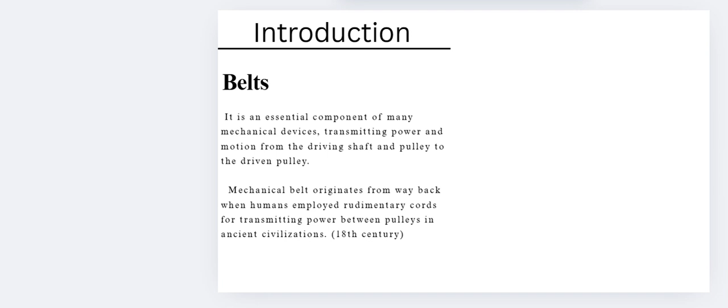Belts are an essential component of many mechanical devices, transmitting power and motion from the driving shaft and pulley to the driven pulley. It is a flexible mechanical element used to transmit power between rotating shafts, typically through pulleys, especially when shafts are relatively far apart or when smooth, quiet operation is desired.

The basic principle is it operates on friction or positive engagement, like in timing belts. The belt wraps around pulleys mounted on the shaft. As one pulley rotates, the driver moves the belt, which in turn rotates the other pulley, the driven.

The common types of belts are flat belt, V belt, and timing belt. Belts are cost effective and easy to maintain, absorb shock and vibration, protecting machinery. It is a quiet operation compared to chains or gears, and it allows for slip, which can be a safety feature in overload conditions.

For design consideration, the belt system must consider power to be transmitted, shaft distance and alignment, tension and speed, and environmental conditions like dust and temperature.

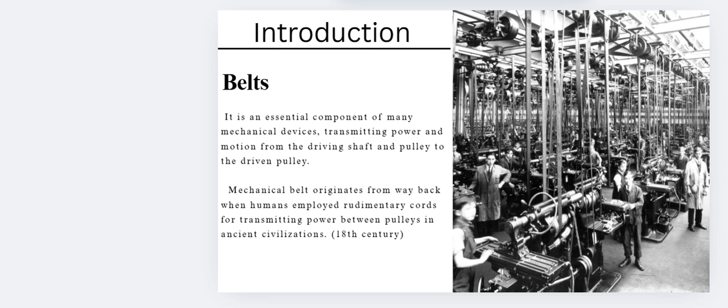Here is the fundamentals of belts. What are the basic parts of belts? The first term is belt. Power transmission occurs through a flexible element. A belt is a flexible loop, typically made of rubber, fabric, or synthetic materials, that transmits mechanical power between shafts.

Pulleys are rotating elements wrapped around fairly tightly by belts. A pulley is a wheel with a groove designed to hold the belt in place. The driving pulley connects to the power source like a motor, while the driven pulley connects to the component receiving power.

Pulleys determine the speed ratio between the input and output shafts. Smaller pulleys spin faster, larger ones spin more slowly.

Here is the shaft, the axle on which pulleys get mounted fairly rigidly underneath machines. It is a rigid, shapely component that rotates and supports pulleys. One shaft is power driving and the other is torque driven. Shafts are typically supported by bearings and elements to minimize energy losses.

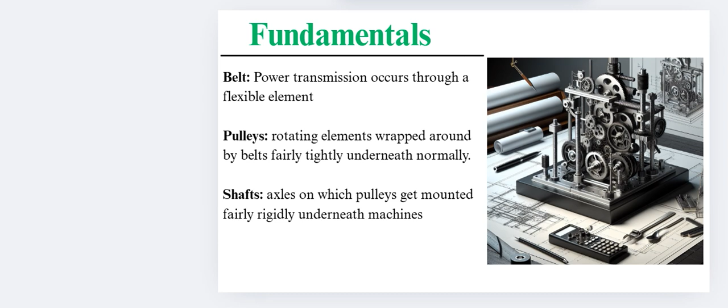Here is the diameter. The pitch circle is essentially the size of the pulley where the belt engages tangentially with considerable frictional force. Diameter refers to the size of the pulleys. The ratio of the diameters affects speed and torque transmission.

Next is the center distance, the distance between the centers of two pulleys, measured quite accurately under normal operating conditions. This affects belt tension and alignment - if the belt is not fit properly, it may sag or slip.

The third element is slip, relative motion between belt and pulley, leading sometimes to considerable power loss under certain operating conditions. Slip occurs when the belt doesn't move in perfect sync with the pulley, causing a difference in relative motion. This reduces efficiency and can affect speed accuracy. Flat belts and V belts experience more slip than timing belts, which are designed for precise synchronization.

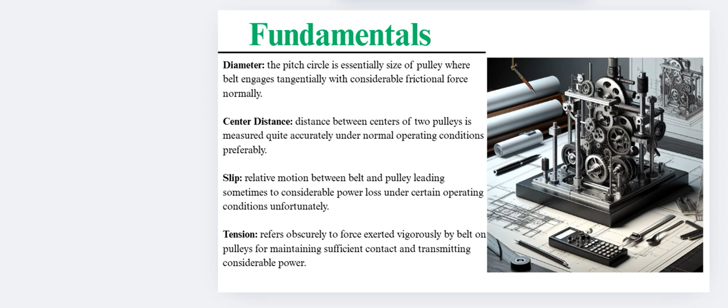Here we have the two types of belt connection: the open belt and the cross belt. The open belt configuration has the belt running in a simple loop with both pulleys turning in the same direction. As we can see, the upper side is the slack side, and the lower is the tight side.

This is the driving pulley, and this is the driven pulley. The purpose is for the driver and driven shaft to rotate the same way. A common use is in fans, pumps, or conveyor systems where synchronized direction is required. The pros of this is that it's simple to install.

Less wear on the belt since there is no twist. So the limitation is it's slightly more prone to slip compared to cross belt.

The right here is the cross belt. The belt is twisted in a figure 8, so you can see the number 8 like this. The figure 8 causes the pulley to rotate in the opposite direction. The purpose is when you need the driven shaft to rotate in the opposite direction of the driver. It is commonly used in textile machines or where reversal is essential without changing the mechanism.

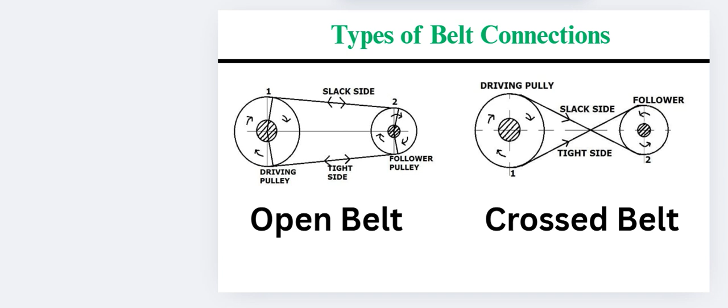So the third slide is the uses of belt. There are three types of uses of belts.

The first one is power transmission. Mechanical systems transfer energy between rotating shafts using belts quite efficiently, with considerable flexibility and relative ease. In power transmission, belts connect one spinning part to another, like a motor to a machine. When the motor turns, the belt carries that motion and makes the other part move too. Think of how a bike chain works, but smoother and quieter.

So conveyor services in the Philippines, R. Dan & Co., Inc.. They provide conveyor machines and processing belts along with consultancy, installation, and maintenance services. In factories or airports, belts move things from one place to another, like boxes, packages, or even your luggage at the airport riding on these belts, like a flat moving road.

The third one is elevator services. In the Philippines, Access Lift and Electronics Corporation specializes in elevator repairs and maintenance, handling even the toughest problems with experienced personnel. So belts help elevators go up and down. They connect the elevator car to a motor system. When the motor turns, the belt lifts or lowers the car safely, in the maintenance problem.

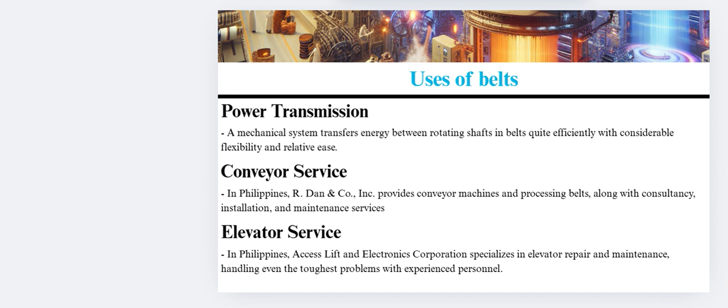Here we have the three types of transmission belts. Flat belt: flat belts are power transmission belts that are flat and made of rubber, synthetic composite, or leather. So a flat belt is like a ribbon, flat and wide. It runs smoothly over flat pulleys and was common in older factories. It is quiet and good for low to moderate power over long distances, but it can slip more easily if it's not tight enough. V belts often drive various engine accessories like air conditioning compressors and alternators rapidly on many automobile engines nowadays with great efficiency.

So the V belt is shaped like a V in cross section. This belt fits into matching V-shaped grooves on pulleys. That shape gives it better grip and makes it great for high power, high speed machines. You'll find V belts in things like car engines, log moving equipment, and lawn mowers.

The toothed belt is known as a timing belt or cogged belt. It is a flexible belt with teeth molded onto its inner surface. This one has tight teeth on the inside which fit perfectly into matching grooves on the pulley. That makes for no slipping at all. It keeps parts turning in sync, super useful for engines where precise timing is critical, like in your car's camshaft system.

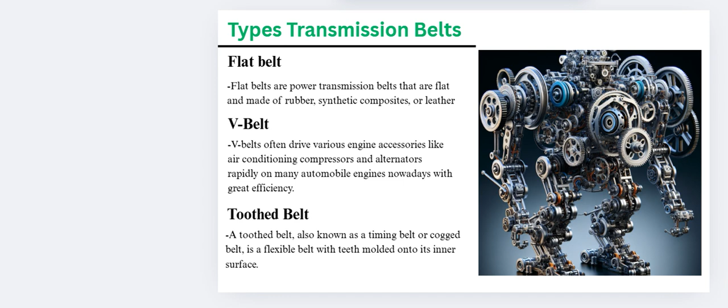Here we have the flat belt. Usual flat belt materials are leather, rubber, stitched canvas, and balata. Leather is one of the oldest materials; it's strong, flexible, and grips well, which helps reduce slipping. Rubber belts are elastic and can absorb shock, which protects machines from sudden jerks.

Stitched canvas is made by layering and stitching fabric, making it both strong and lightweight. Balata, less common, is a natural rubber-like material. It is water resistant and doesn't conduct electricity, so it was ideal in settings where safety was a concern.

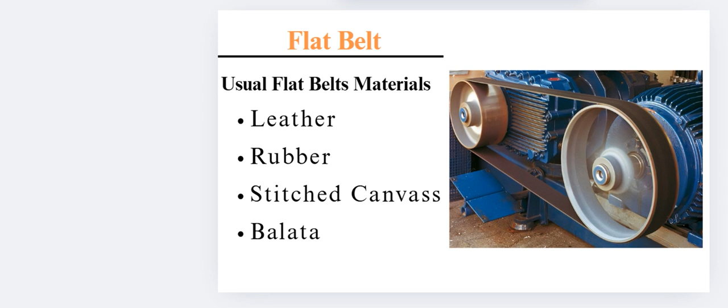Here are the advantages of flat belt: high speed drives, dusty and abrasive environments, long distance between shafts, high efficiency, low cost, and low maintenance.

For high speed drives, flat belts are lightweight and flexible, so they can run very fast without generating much heat or stress. For dusty or abrasive environments, their flat, open design means they don't trap dust or grit easily, and there's no need for close fitting parts like gears or chains. For long distances between shafts, because they are so flexible they can be made very long, flat belts are ideal for connecting machines that are far apart.

High efficiency when properly tensioned and aligned. Flat belts have less bending and friction loss compared to other belts. That means more of the power actually gets transmitted, so efficiency can reach up to 98%.

They're also cost effective, low cost and low maintenance. They're simpler to manufacture and install, and don't need constant lubrication or adjustment. If one wears out, replacement is cheap and quick.

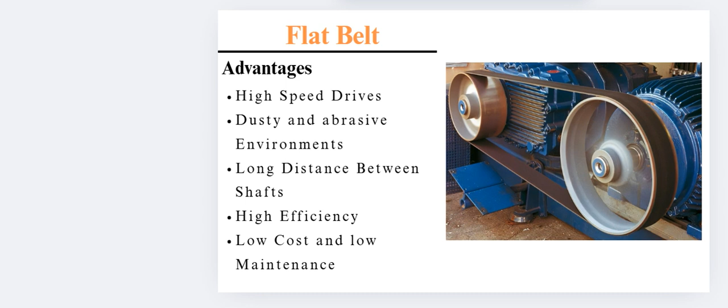Now here are the limitations of flat belts. The disadvantages include noise, slippage, limited speed, quick wear, and alignment issues.

The first one is noise. At higher speeds or under heavy loads, flat belts can slap or flutter, creating noticeable sound, especially if the tension is not perfect.

Next is slippage. Since they rely on friction, any drop in tension, or a wet or oily pulley, can cause the belt to slip, reducing performance.

Limited speed: flat belts are not ideal for carrying heavy loads, so they can stretch too much compared to toothed belts or chains.

Frequent wear: friction-based systems tend to wear out faster, especially if exposed to excessive heat or misalignment over time.

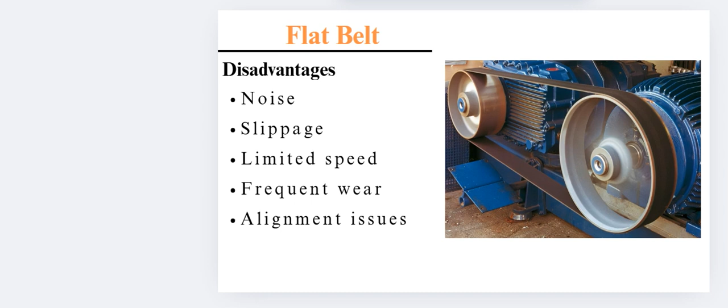Alignment issues: if the pulleys are not perfectly lined up, the belt can wander or come off entirely. Flat belts are more sensitive to this than belts which stay in grooves.

So here are the flat belt design formulas. The belt tension ratio is the ratio of tension on the tight side to the slack side of the belt.

F sub 1 minus F sub 2, all over F sub 2 minus F sub C, equals E raised to F times theta.

F sub 1 is the force on the tight side, the unit will be Newton or pound. F sub 2 is the force on the slack side, the unit will also be Newton or pound.

F sub C is the centrifugal force, the unit must be Newton or pound. E is Euler's number, with a value of 2.71.

F is the coefficient of friction. Theta is the angle of contact, and the unit must be radians.

So here we have E, the irrational number, raised to F times theta minus 1, all over E raised to F times theta.

F sub 1 is the force on the tight side, the unit is Newton or pound. Theta here is the angle of contact, the unit is radians. F sub 2 is the force on the slack side.

So remember everyone, F sub 1 is the force on the tight side, and F sub 2 is the force on the slack side.

F sub C is the centrifugal force, the unit must be Newton or pound. F is the coefficient of friction, meaning it has no unit because it is a coefficient.

The angle of contact, theta, equals 180 degrees plus or minus 2 sine raised to negative 1.

Times d sub 2 minus d sub 1, all over 2C, as an open belt connection.

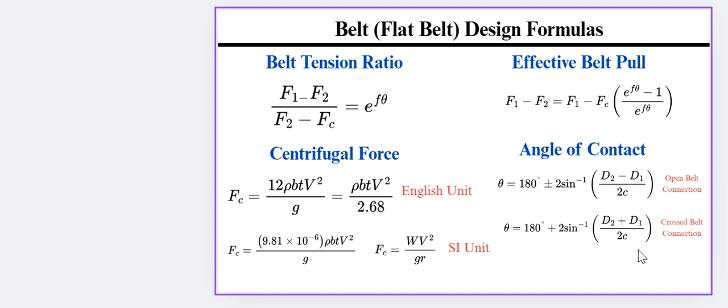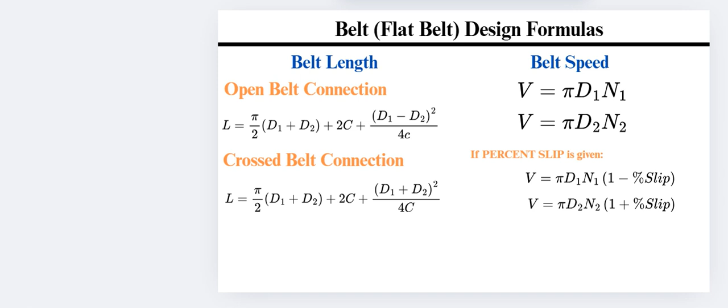Here we have the V belt. Usual V belt materials are rubber, polyurethane (PU), neoprene, Kevlar or aramid fibers. Using rubber is a classic choice; rubber is flexible, affordable, and bends well. Polyurethane, as PU, is tough and resistant to chemical, oil, and wear. It's great for precision equipment in places where the environment is harsh.

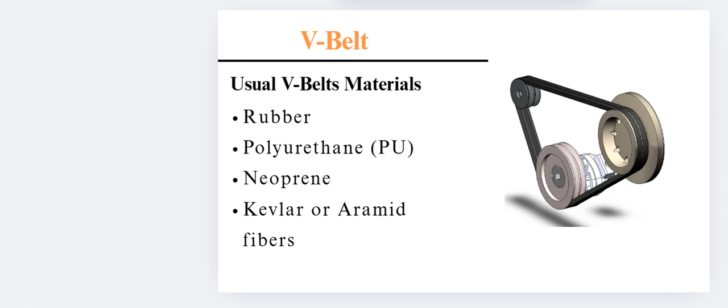Neoprene is resistant to heat, oil, ozone, and aging, which is why it's used in vehicles and industrial machines that run hot. Kevlar or aramid fibers are incredibly strong and don't stretch easily. They keep the belt tight and prevent it from slipping or snapping under high loads.

The V-belt advantages are high grip, efficient power transmission, low maintenance, noise reduction, and space efficiency. High grip means the belt wedges firmly into the pulley grooves, increasing friction, which means less slipping and better traction. Efficient power transmission means V-belts can transfer more torque with less slippage than flat belts, so the power from the motor gets used more effectively.

Low maintenance means once properly installed, this V-belt needs no frequent tightening or lubricating like a chain or gears. For noise reduction, V-belts run smoother and quieter at moderate speeds. Space efficiency allows them to fit in tight spaces while still transmitting significant power.

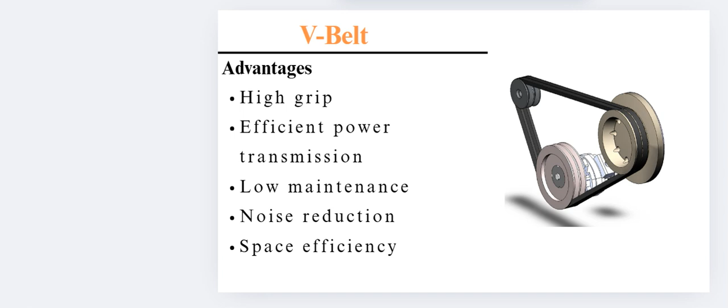Now the disadvantages of V-belts: wear and tear. Friction is great for grip, but it also leads to material fatigue over time. Heat, dust, or oil can make them crack, fray, or lose shape. There are also efficiency losses, some power is lost through slight slippage or flexing under load.

Replacement can be challenging. In some machines, replacing a worn belt is not easy; it requires removing guards or nearby parts, since the belts are buried deep inside.

The last disadvantage is limited speed range. At very high speeds, belts can flutter or heat up, especially if the tension is not right, which can shorten their lifespan or cause unexpected slippage.

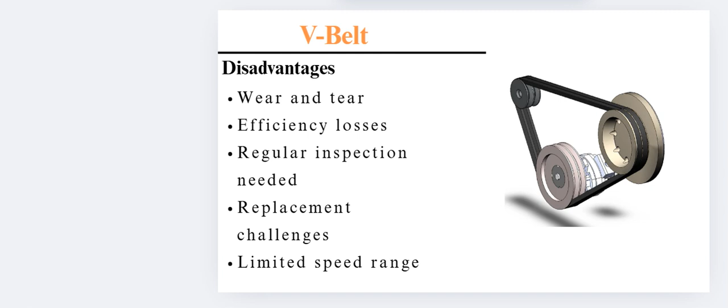Here's the formula for the V-belt and its ingredients. The belt tension ratio: F sub 1 is the force on the tight side, minus F sub 2, the force on the slack side, minus the force F sub C, the centrifugal force. This force F has units of Newton or pound. The theta here is the angle of contact, with units of radians. The f is the coefficient of friction, with no unit. This is the sheave angle, one half of the sheave angle, with units of degrees. The E here is the constant number 2.71.

Effective belt pull: F sub 1 minus F sub 2 equals F sub 1 minus F sub C, times the ratio, E raised to f times theta over sine of half the sheave angle, minus 1, all over E raised to f times theta over sine of half the sheave angle.

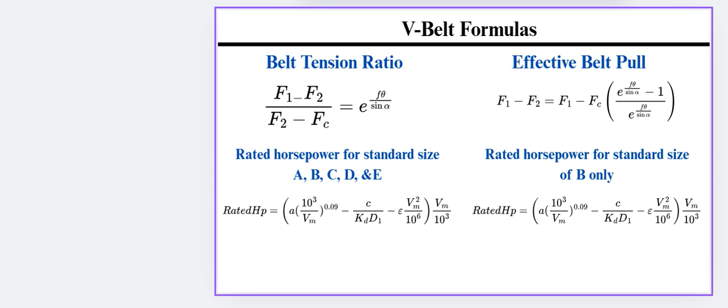Adjusted rated horsepower equals K sub theta times K sub L times rated HP. K sub theta is the arc of contact factor, and K sub L is the length correction factor. This next part is the design horsepower.

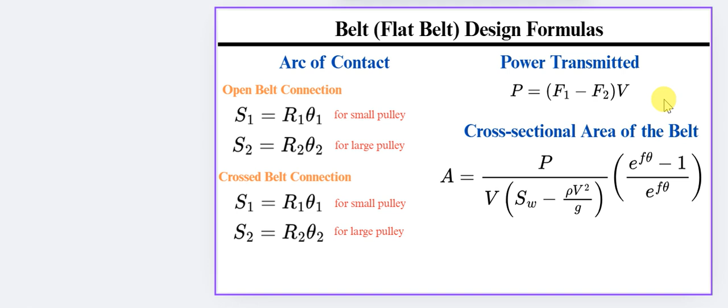Design horsepower equals power transmitted times N sub SF. The power transmitted is shown right here: P equals F sub 1 minus F sub 2, times the belt speed.

So N sub SF is the service factor. The number of belts, N sub B, equals design horsepower all over adjusted rated HP.

So the belt length, for the open belt: L equals pi over 2 times d sub 1 plus d sub 2, plus 2 times C, plus the square of d sub 2 minus d sub 1 all over 4C. For the cross belt: L equals pi over 2 times d sub 1 plus d sub 2, plus 2 times C, plus d sub 2 plus d sub 1 raised to 2 over 4C.

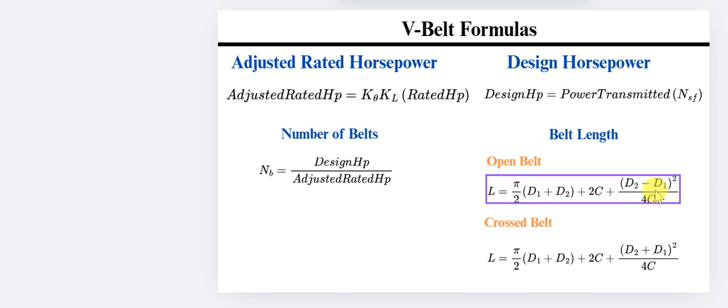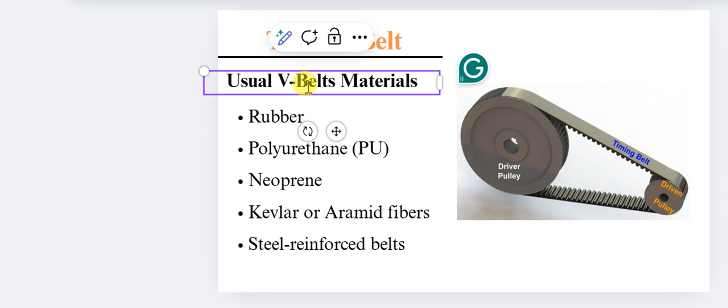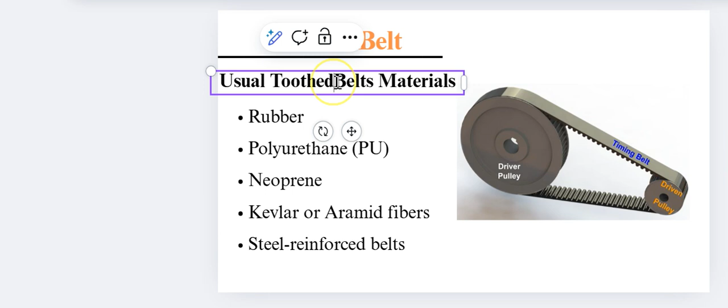For tooth belt, usual materials for tooth belts: rubber, polyurethane (PU), neoprene, Kevlar, or aramid fibers.

Kevlar fibers are super strong fibers used as tensile cords inside the belt. Steel reinforced belts are used when ultra high strength is needed, like in heavy machinery or racing engines.

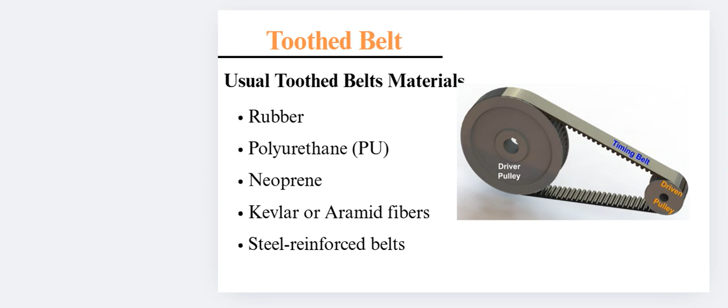This is the advantage of tooth belts: high torque capacity, no slippage, low noise and vibration, no lubrication required, and consistent speed transmission. High torque capacity because the teeth match and work on the pulley, so the belt can handle more force without slipping, with no slippage due to the positive engagement between the teeth and the pulley.

There's no room for slippage even under heavy loads. Low noise and vibration — they run smoothly and quietly because there is no metal contact. No lubrication required — tooth belts don't need oil or grease, which means cleaner operation and less mess in maintenance.

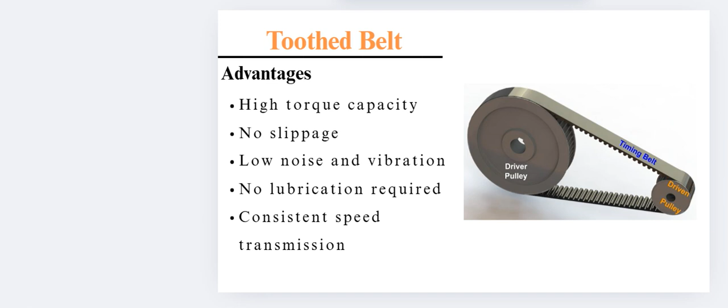Consistent speed transmission: the belt cannot slip. The driven part stays in perfect sync with the driving pulley. So the limitations of tooth belts are: higher cost, complex design, limited flexibility, no overload protection, and replacement challenge.

Higher cost, because the best tooth belts are made with precision materials like reinforced fibers, so they can cost more up front than basic belts or flat V-belts. Complex design: the system requires teeth aligned perfectly with the pulley grooves.

Limited flexibility because of their tooth structure, they don't bend as easily around tight curves or small pulleys. No overload protection: it sometimes jams or the load suddenly spikes, and the tooth won't slip — it will snap or strip instead. Replacement challenge: changing a tooth belt can be tricky, especially in engines or closed systems where the timing has to be reset precisely.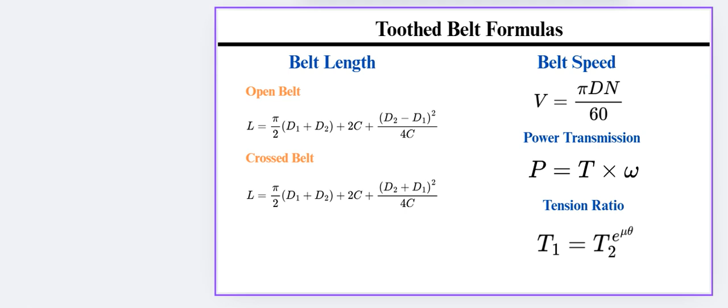On the next slide is lagging. The next slide is the application of belts. So for automotive industry...

For automotive industry, belts manage everything from engine timing to running the alternator, water pump, air conditioning, and more. It delivers precise movement without slippage. It operates quietly and smoothly. It can handle high speed and high temperature environments.

In industry machinery, in factories, belt powered drills, mills, and conveyors allow flexible layouts even with machines far apart. They can run at high speed with high efficiency, and do not require lubrication like chains, keeping things clean.

For agriculture, farm machinery like tractors, balers, harvesters, and sprayers depend on belts to drive mixer and conveyor components. They can withstand dusty, dirty outdoor environments, absorb shock to protect machines from rough terrain, and are relatively easy to replace in the field.

HVAC stands for heating, ventilation, and air conditioning. Since HVAC systems have power blowers, compressors, and fans, belts operate quietly for indoor comfort, require minimal maintenance over long hours, and can transmit power efficiently in tight spaces.

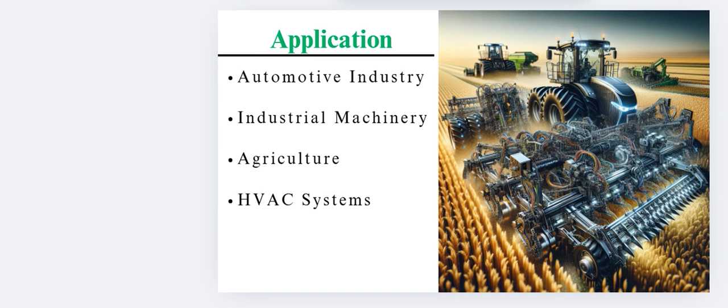So I have a few questions. I have five sample problems. Problem number one right here.

What horsepower is to be taken off the driven shaft from an open belt drive operating under the following conditions: driving pulley 84 inches in diameter, driven pulley 48 inches in diameter, speed of the driving pulley 150 RPM, total tension on the tight side of the belt 300 pounds, total tension on the slack side of the belt 50 pounds. The hint answer is horsepower equals 25 horsepower.

Let's solve this. So the given: D sub 1 is 84 inches, the driving pulley. D sub 2 is 48 inches. The speed is 180 revolutions per minute. F sub 1 is the tight side, 300 pounds. F sub 2 is the slack side, 50 pounds. So the unknown, the required, is first: what will be the power?

The answer must be in horsepower, HP. It is an open belt—it mentioned that it is an open belt. Diameter of 1 is 84 inches, diameter of 2 is 48 inches. The speed is 180 revolutions per minute. F sub 1 is 300 pounds, F sub 2 is 50 pounds.

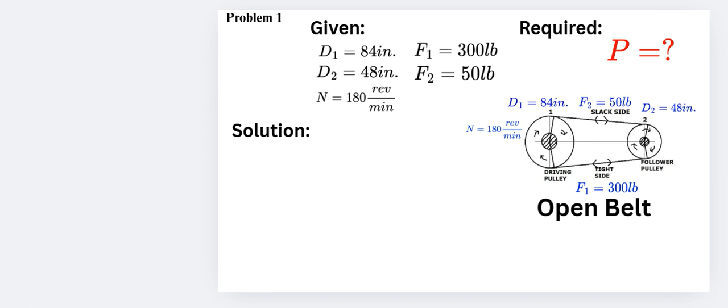So let's come up with the solution. It requires the power, so we will use the power transmitted formula with belt speed. We can combine and integrate it. This is the formula. There is a constant of 33,000 feet-pound-force over minute because it is in English units. 1 HP equals 33,000 feet-pound-force over minute.

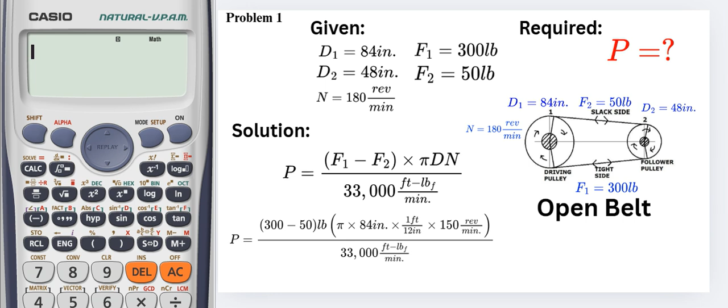Use a calculator: 300 minus 50, the difference, times pi, times 84 inches converted to feet using 1 foot to 12 inches, times the speed per minute, plus this, divided by 33,000 — that's 24.98. We need to round up to the whole value, so it will be 25. The answer is power equals 25 horsepower, same as the hint answer.

Problem 2: A double ply leather belt transmits horsepower from a motor with a pulley of 8 inches in diameter running at 17 hundred revolutions per minute to a pulley of 24 inches in diameter. The difference in tension may be taken as 20 pounds per inch of belt width. Belt thickness is 0.2 inches. Calculate the width of the belt.

So let's bring down the process. The given is: power is 10 HP. The driven pulley diameter is 24 inches. The driving pulley diameter is 8 inches. The difference in forces is 20 pounds.

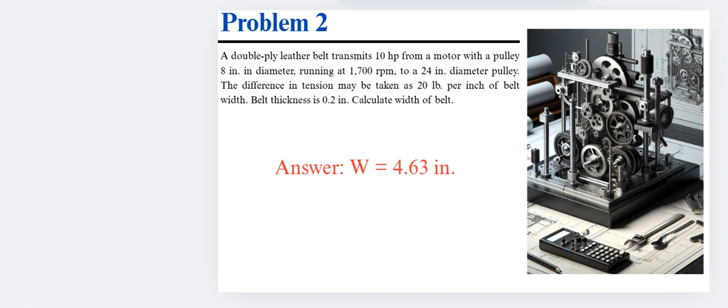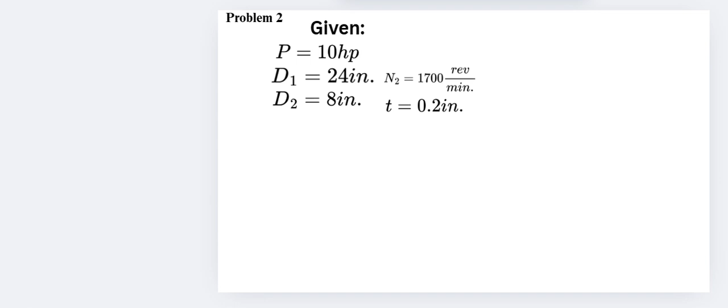So the thickness is 0.2 inches, the belt thickness. So the required belt width, so I assume it is an open belt. This is the representation.

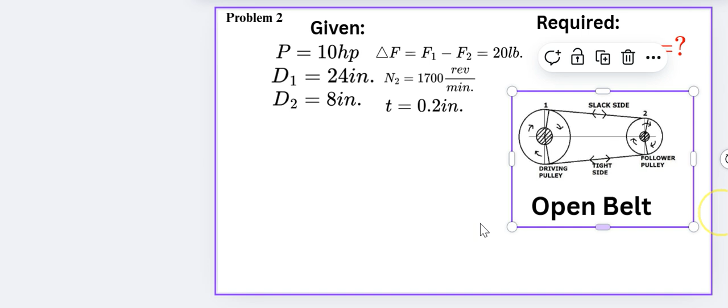This is N sub 2, the 1700 per minute, with a driven pulley. The solution: we are transmitting with belt pulley, belt speed transmitted right here.

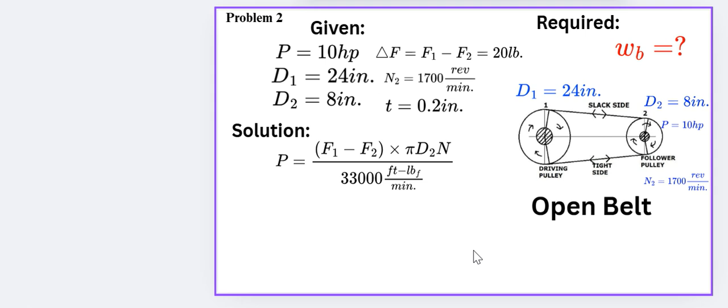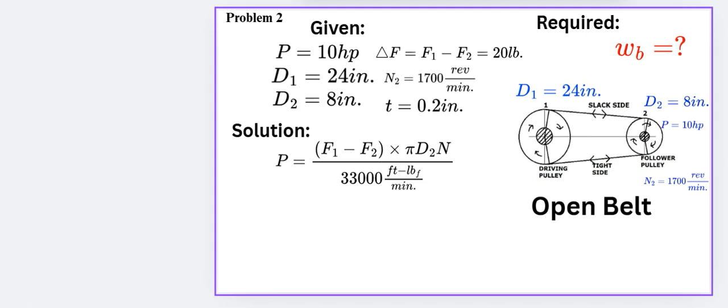Again, 1 HP is equal to 33,000 feet pound-force over minute. We use that because the unit in the problem is English.

So let's put the values in for the variables. We put belt width into the difference of tension, which is connected to the belt width. Findings is the belt width, the answer for belt width. So we put this in. If we solve this in the calculator, it will give us 10 HP.

20 pi times 8 times 1 over 12 times speed. It's lagging, sorry. 33,000. 1 HP equals to 33,000 times pound-force per minute. So the answer, oh wait, I forgot the width, chips up.

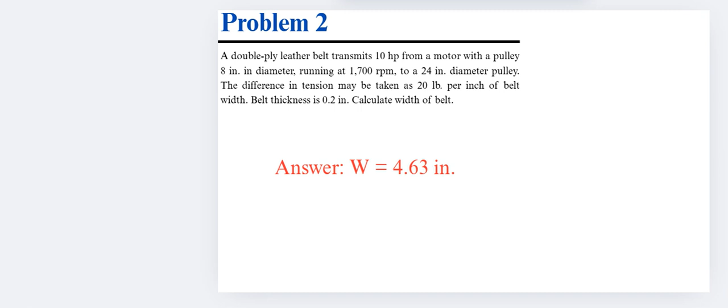That will give us 4.63. So 4.63, we must consider as the engineering decimal. The answer for belt width is 4.63 inches. The unit analysis can be inches. 0.2 could be inches.

Cancel, cancel, cancel. Use HP, but we must neglect it because the unit of belt width must be inches, so we must assume it's inches.

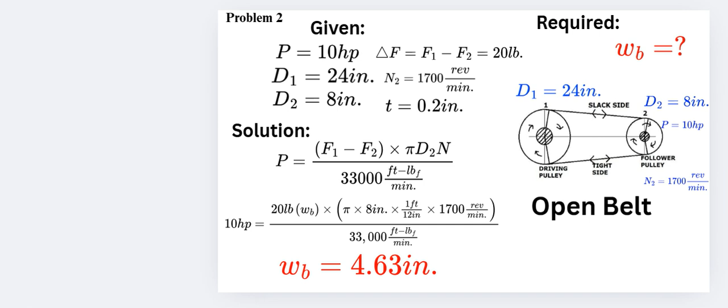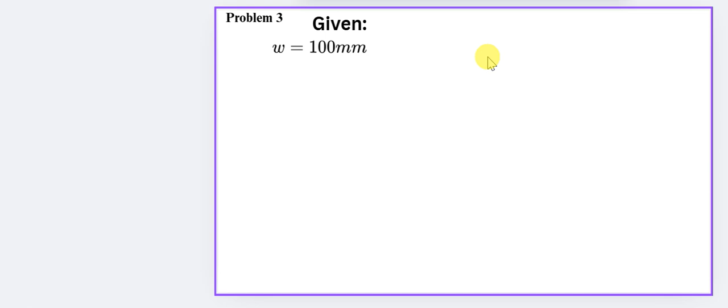So the hint answer is centrifugal force equals 209 Newton. Let's solve this, we must put the given: width 100 millimeter, thickness is 6.4 millimeter, belt speed is 18.3 meter per second.

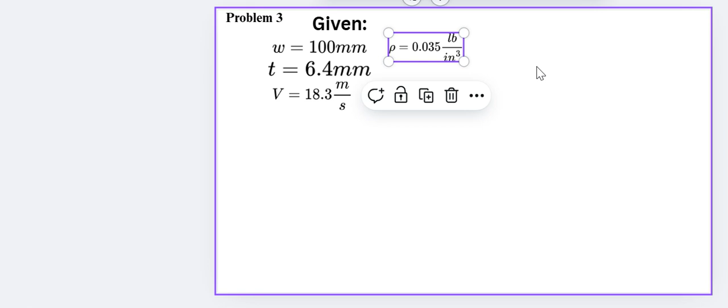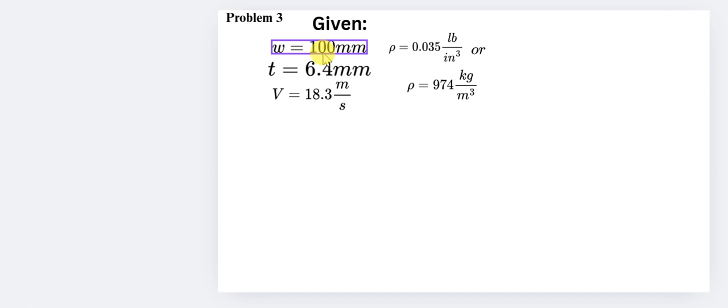Density 0.035 pound over cubic inches or 974 kilograms per cubic meter. So the value here is SI unit. We neglect the 0.035 pound per cubic inches because it is an English unit. The given is SI unit, so we must consider the 974 kilogram per cubic meter.

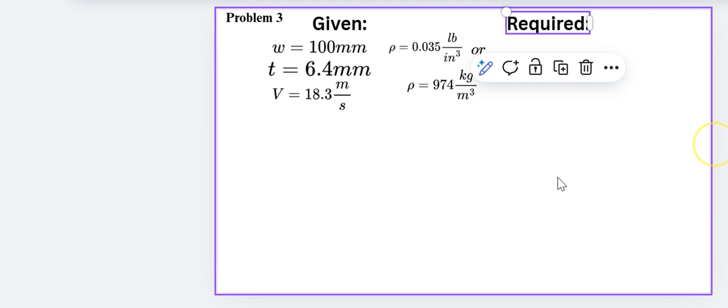So required: centrifugal force. Solution. The formula we will use is the centrifugal force formula as SI unit because the given value is SI unit. We put it right here.

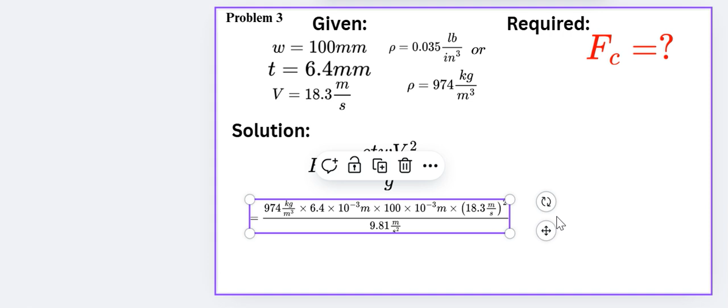Let's bring down, let's transfer the value to the variable. So 974, 6.4 times 10 raised to negative 3 meter, we convert it from millimeter to meter, that will be 1000 over 1000 right here. And then the belt speed is 18.3 meter per second, with parenthesis raised to squared. Why is there a squared here? Because we need to cancel this meter per second squared.

Cancel, cancel. It needs to become kilogram meter. We need to have a kilogram meter to become a Newton. So if we put it in the calculator.

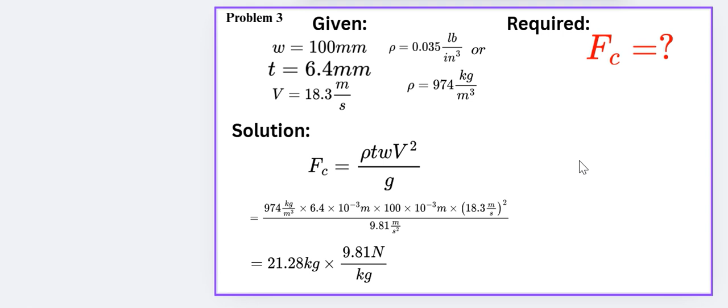1 kilogram to Newton, that will be times 9.81. Wait, 9.81 times 1 kilogram, that gives 208.75, but we want a whole number, so that will be 209 Newton.

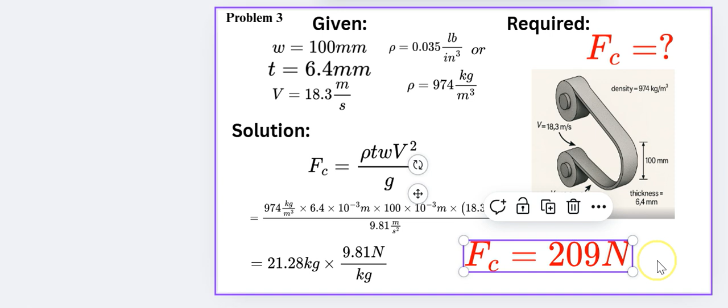So the given answer, the hint answer is B sub driver equals 21.66 meter per second. So let's solve this.

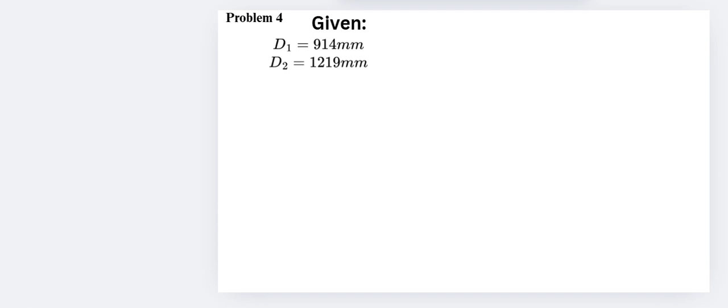Center distance is 9 millimeter. It is 9 millimeter, right? 9 millimeter... sorry, it is 3 meter. Center distance 3 meter. So, 3 meter, power is 84 HP.

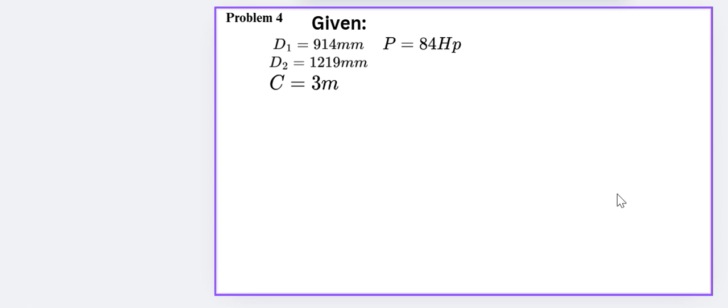That'll be the belt speed, 1280 meter per minute. The slip is 1.5%. It requires the speed of the driver. Speed of the driver.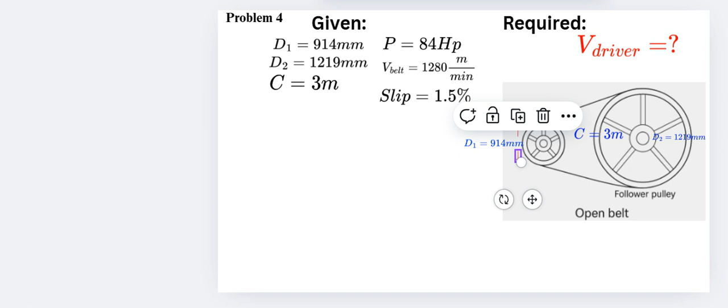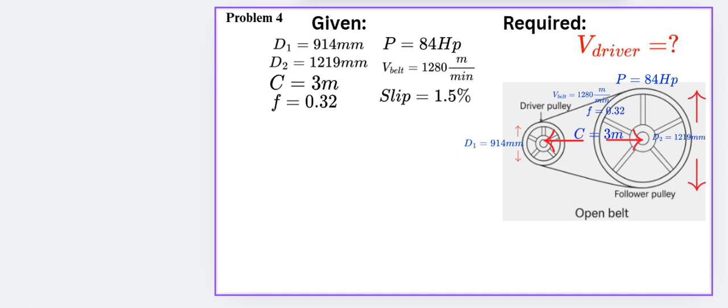We're putting in the given. So the solution: we use the percentage slip formula as the driver. We put the value with the variable, like that.

So cancel, leaves us revolution per minute. Let's check if the answer is correct: 452.6.

So, 1.219 converted to millimeter, divided... or should I say like this: 1 meter over 1000 millimeter, times 1, times 1 minus the percentage slip, 1.5 divided by 100 to remove the percent.

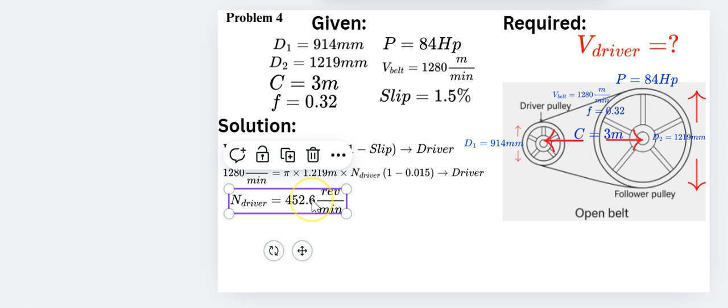And we will use a belt speed. The speed will be V equals pi times D times N. So this is the value.

So let's transfer the value to the variable. So it looks like that. So 1.219 meter because of conversion: 1219 millimeter converted to meter, divided by 1000.

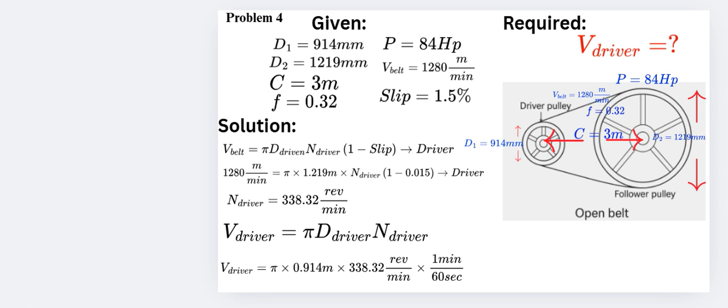That will give us 16.19 meter per second. So the answer, 16.19 meters per second, the hint right here is wrong.

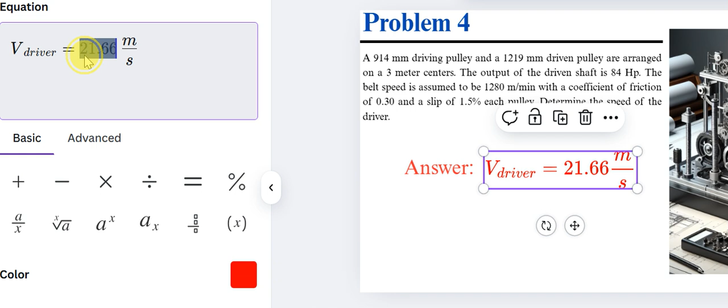The hint right here is wrong. That's why you need the calculator to check on it. So you got the right formula, but the answer is wrong. But checking your calculator, you can change it into the right answer. This will be 16.19. Do some checking using calculator.

So the last problem: compute the surface velocity of a pulley 18 inches in diameter mounted on a shaft running at 350 revolutions per minute. The given hint for the answer is velocity equals 1649.34 feet per minute. So let's solve this using our calculator for checking.

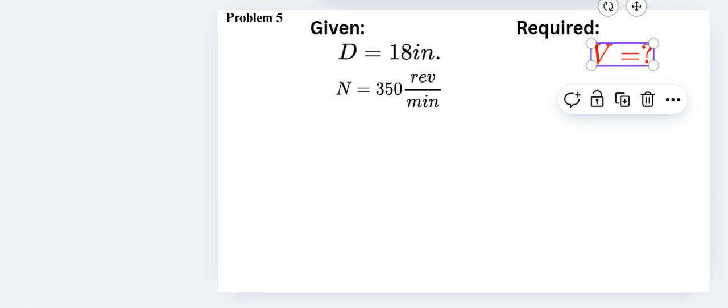So the diameter is 18 inches, that's the diameter of the pulley. The speed is 350 revolutions per minute. Same, required: the required answer should be velocity. The representation: this is the pulley, 18 inches, with a speed of 350 revolutions per minute.

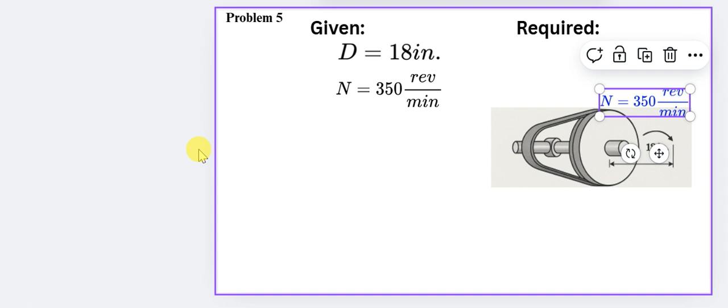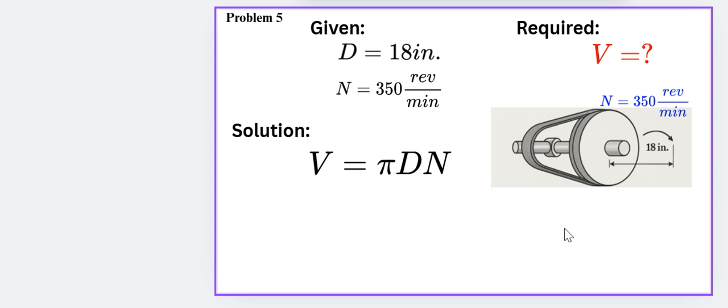So the solution: when there's a problem, there's a solution. Using a belt speed formula, pi D N. V equals pi D N: diameter and the speed.

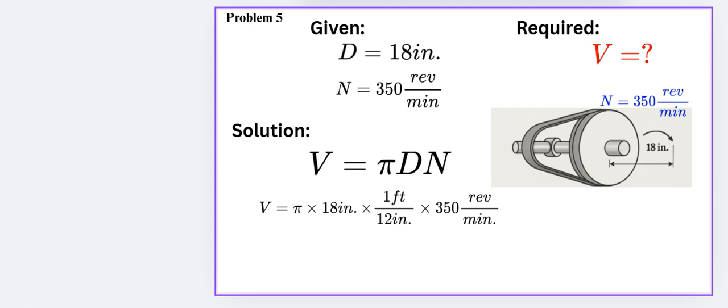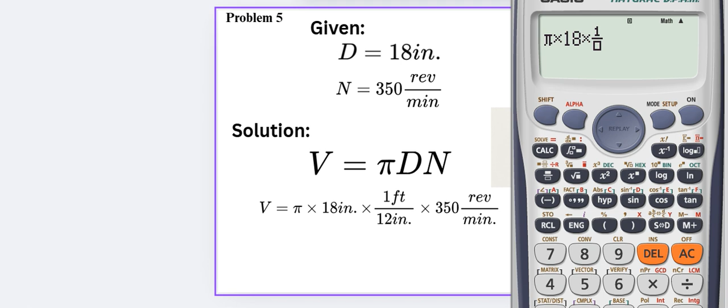So let's put the value in the variable: pi, 3.14, times 18 inches, times 1 foot to 12 inches, because the answer must be in feet per minute, so we need to convert to remove the inches, times 350 revolutions per minute. Let's plug into the calculator: pi 3.14, times 18 inches, times feet per inches, 1 over 12, times the speed in revolutions per minute.

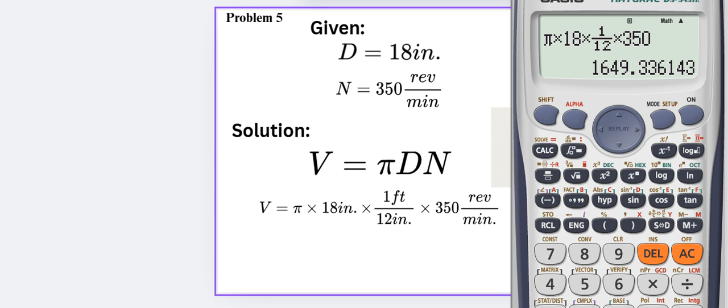That would give us 1649.34. If right here, it is the same, it is the same. So it is right.